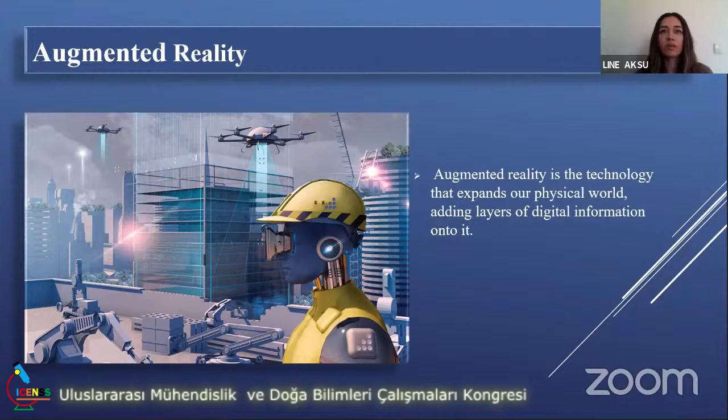So augmented reality is the technology that expands our physical world, adding layers of digital information onto it. Its application to construction projects creates a system that provides a detailed digital model. This detailed model is able to demonstrate how a project will appear at the end with all details embedded inside the model. It can be used for any phase of the construction project. The model can be situated or added on top of existing construction sites to combine reality with digital models effectively.

So what are the benefits? There are actually several benefits of using augmented reality in construction project administration and management, including scheduling and project progress tracking, better collaboration and communication, time and cost management, safety and employee training.

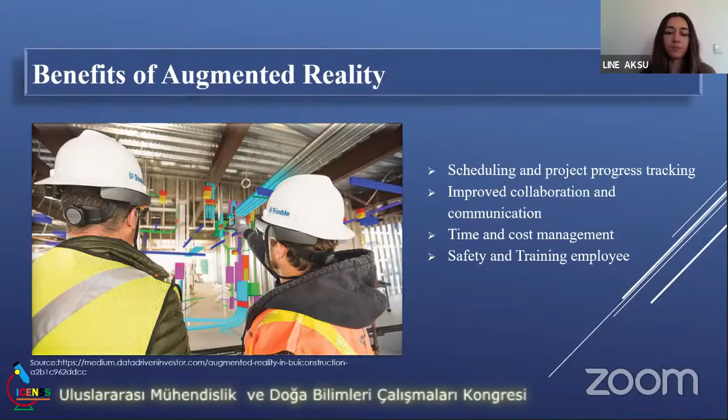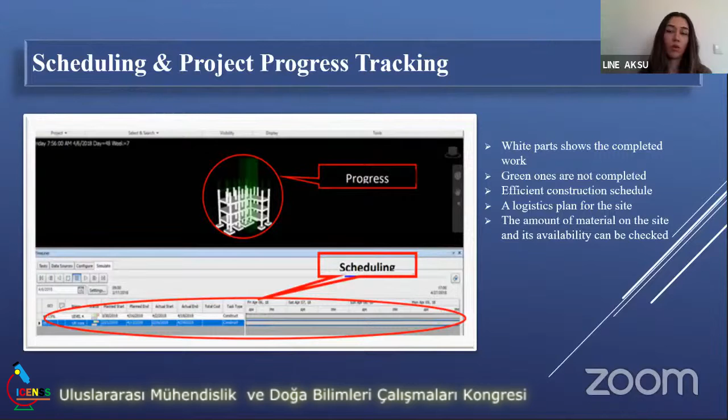AR facilitates scheduling and project progress tracking through enhanced digitalization, so it enables better control of the project and improves visualization. The technology gives a chance to combine and compare the constructed project and planned project at the construction site. It makes it easier to schedule an efficient construction and the logistics plan for the site. Moreover, the amount of material that is needed at the site and equipment storage can also be identified with this technology.

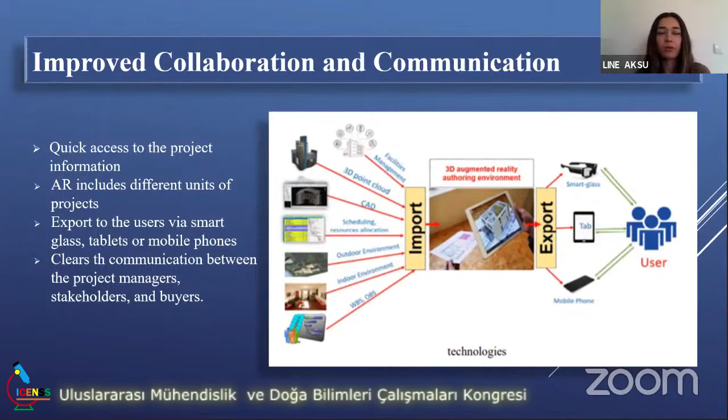So it enables better collaboration and communication among project parties. The system provides quick access through mobile phones. As can be seen in this picture, AR includes different units of projects. It eases the communication with external stakeholders or with the customer while presenting project progress and visualizing the final product. In summary, better suggestions, comments, and decisions can be made by using augmented reality technology in construction works.

Time and cost management. AR partially resolves errors related to misinterpretation from 2D drawings. Also, the usage of AR reduces the amount of manpower needed for defect and quality management, which means less labor, therefore reduced cost of construction.

Construction sites include many heavy equipment that should be safely operated. Training laborers and field personnel for operating the machines takes long hours. However, workers can be trained by using AR. For example, workers can be trained to operate heavy and medium construction cranes, maybe excavators and assembling equipment too.

So there are different levels of AR implementation. Augmented reality is not a standard package that can be installed, bought, or used readily. There are different defined levels based on degree of sophistication and technology involvement. It goes from level 1, which is the most fundamental level, to level 5, which is advanced. Companies planning to implement AR should select an appropriate level system based on their needs, expertise, and technical and financial capabilities to avoid detraction from under or maybe over adoption of the system.

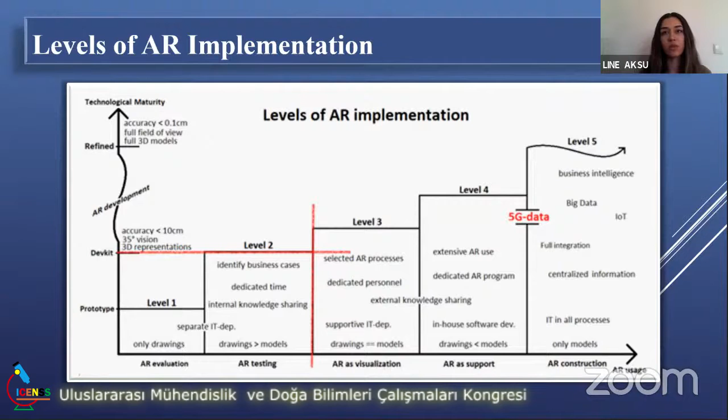So moving forward, we have defect management. Defect management has a great influence on project overrun costs, time, materials, and manpower also. So it can be said that defect management during the construction phase is important to prevent further problems that can occur during the life cycle of the structure. So there are studies concerning defect management systems. However, they are not usually concerned with the information flow from defect detection. So the outcome is reactive defect management plans.

With the mixed usage of technologies such as AR, drones, and building information modeling, a new proactive approach to defect management can be created by enhancing and tying together the visualization, communication, and information flow. It is often challenging to make quality inspections at a large construction site with a limited number of site managers, and it is risky in terms of omissions and faulty decisions, which leads to negative effects on project cost and schedule. Here you can see a scheme of a traditional defect inspection process, which is actually quite a long path to follow.

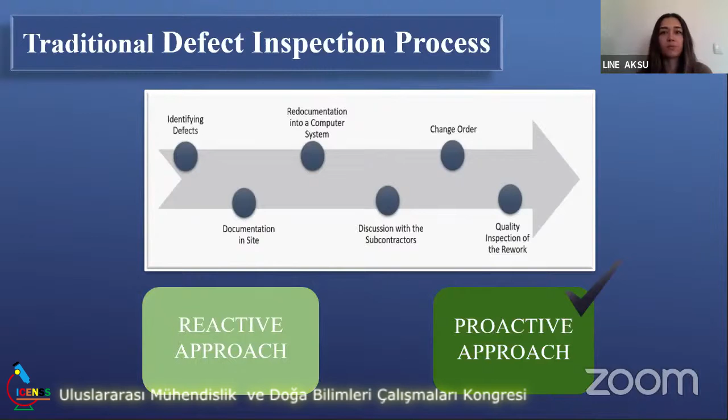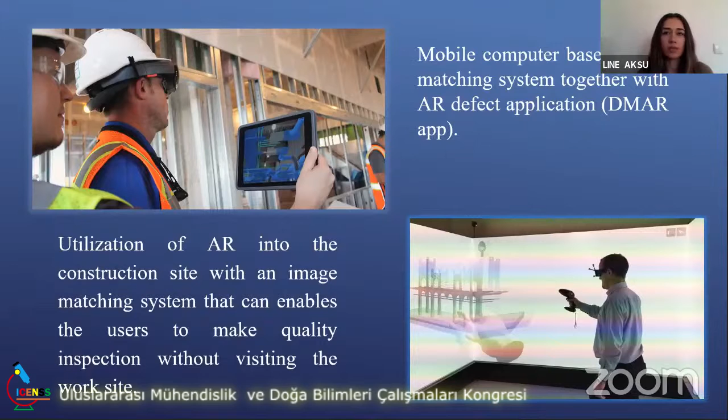However, two methods for defect management have been proposed in academic literature to create a proactive approach. One utilizes AR at the construction site with an image matching system that enables users to make quality inspections without visiting the work site. The other one is a mobile computing-based image matching system together with an AR defect application.

So, drones at construction sites. In areas hard to reach, it is possible to employ drones for close-up visual inspections. Also, they can be coupled with augmented reality systems to provide synergy and enhance the capabilities of both technologies.

As an example of mixed usage of augmented reality and drones, drones with laser scanners or cameras may scan inaccessible parts of a structure. Then they send data to a database that collects and analyzes the data to form 3D visual imagery. So it accelerates creation of digital models in real time. Thus, well-informed decisions can be made.

Drones also enable these processes to be performed with less time and cost by allowing simultaneous work plans and manufacturing follow-up. In addition to indirect cost savings from time and personnel savings, drones reduce energy consumption and related greenhouse gas emissions. The required energy per kilometer of distance traveled is much lower compared to vehicles used for inspection.

For work safety, construction sites continue to be dangerous places to conduct work. In fact, the construction industry appears to be towards the top of statistics in terms of fatal work injuries. This is independent of the level of development of a country. So managers can identify potential hazards early and act before a problem materializes with this technology.

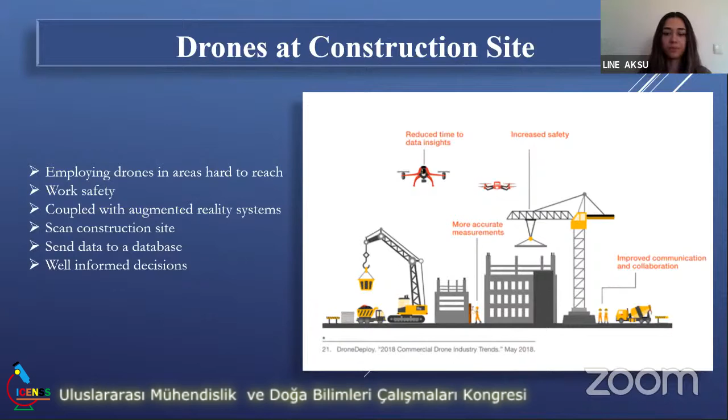So we have an exemplar software, Saha Gözü. During the software investigations, Saha Gözü software was selected. An example application was devised to test the capabilities of the software and to test the ease of use. Saha Gözü is an application developed by Dr. Onur Pekcan at the Middle East Technical University to make supervision on construction sites easier and increase communication between stakeholders with the compilation and processing of photographs obtained from UAVs.

It may be used to measure and manage construction sites using visual tools. A digital model of the project can be created, and the field development can be followed with 3D models created remotely. Measurements, inspections, and follow-up can be provided to project stakeholders from a common platform. Also, data can be exported into other programs for building information modeling and CAD applications.

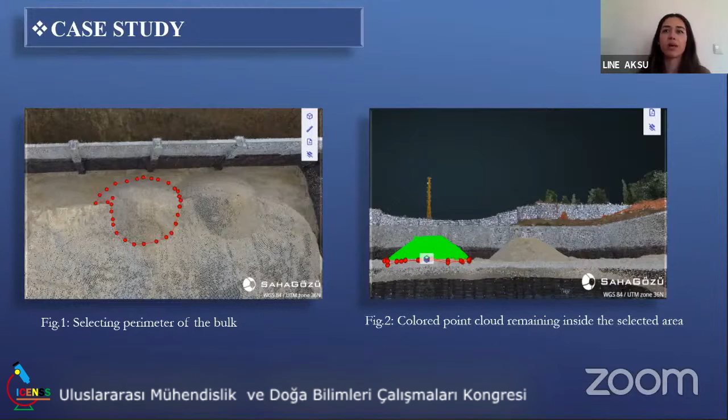Obtaining results from the software was easy, did not require prior training, and took a few minutes to complete. The volume calculation tool on the menu was used to calculate cut and fill volumes of excavation works in the field. Then the perimeter of the bulk for volume calculation was selected in points as presented in figure 1. When the area selection was completed, the point cloud remaining inside the selected area was automatically selected and colored with the Saha Gözü volume calculation tool in figure 2.

The software offers users a choice of 4 predefined reference planes: maximum elevation, minimum elevation, average elevation, and a fitted level. Or the user can enter a desired elevation value too. The reference plane for adjusting the point cloud level to be included in the volume calculation was selected as average level in figure 3. Cut and fill information in cubic meters and the dimensions of the selected area in square meters were given as a list by the software as an output.

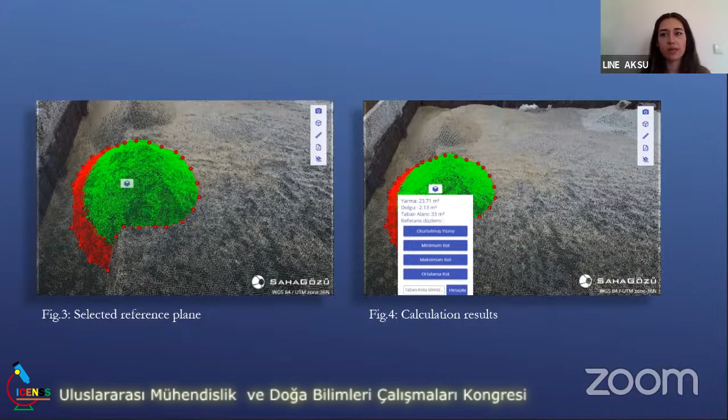So in conclusion, augmented reality may bring significant benefits to construction project administration and management in several areas. Likewise, drones at the construction site have potential benefits in a number of areas, including work safety, time and cost control and savings, project progress tracking, team coordination, and also carbon emission reductions.

An example application was carried out as a part of the study to demonstrate that once digitized through technologies, software such as Saha Gözü makes visualization, planning, as well as calculations easy, quick, and within reach of existing technical personnel without rigorous training.